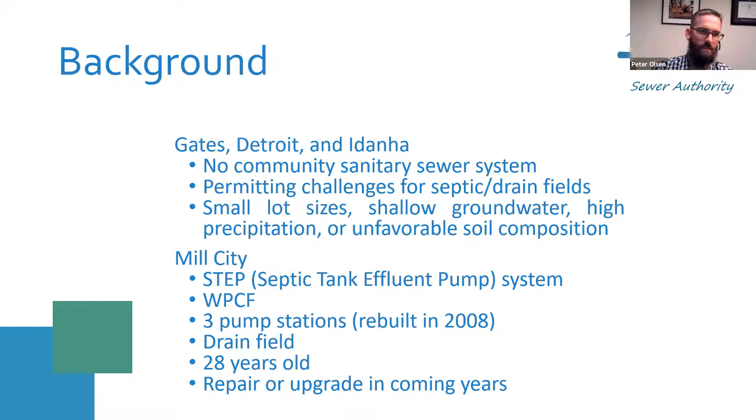Overall concepts for the wastewater study. Peter, I'm going to just remind you that there are going to be some people on the phone, so some of these you may actually have to talk through. All right, fair enough.

So the overall concept of the wastewater master plan: the elephant in the room and the big subject here is the 3-basin rule. The 3-basin rule essentially is you cannot discharge to the surface waters and increase the loading to the North Santiam River. This rule has been in effect for decades and has limited the capability to have a wastewater system that discharges to surface water through typical permitting processes.

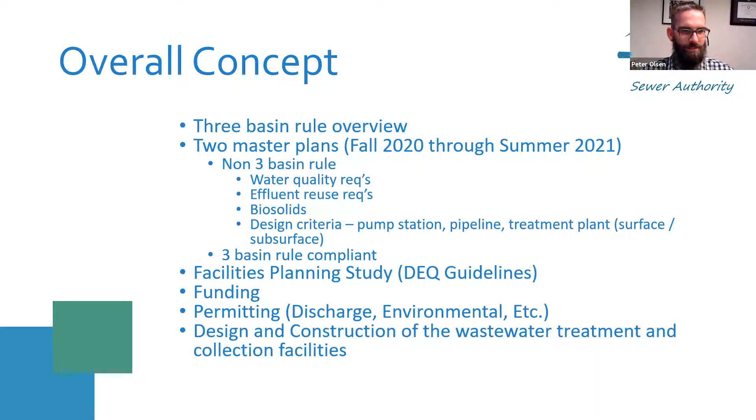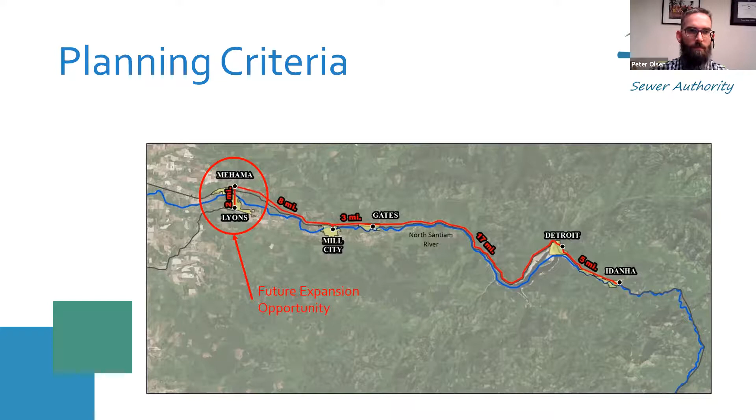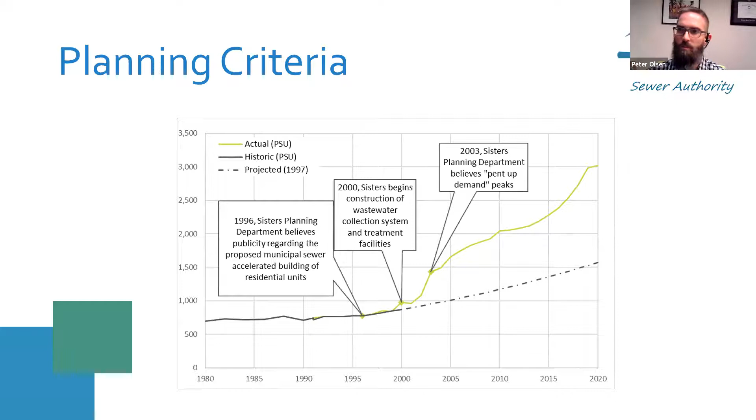As I mentioned, we looked at Sisters as a case study to inform us. It was not based solely on Sisters and what happened there, but it is just over the mountain. They installed a system around 2000 and saw a big growth increase, higher than what PSU had projected, because PSU doesn't account for things like this. So we used their data to help formulate what that growth rate might look like for the North Santiam Canyon with a community sewer system in each of these communities.

Then we took the growth rate that we had established, which I mentioned already, 1.6%, and applied that to each of the communities. And we looked at these on a basin basis. So Gates and Mill City would be combined, and Detroit and Idanha. And for this part of the study, we did look at Lyons and Mehama and what that growth rate would look like. And then we combined them all to see the overall population and what that projects out to be. And you can kind of see the flatter portion, the light blue of the graph here, that's what PSU's population projections would show. And this is what the 1.6% growth rate would project out to be.

And I would like to point out one other piece, that when we were doing this augmented calculation for their planning criteria originally, this started with the feasibility study in 2016 and 17. The Detroit and Idanha number, we didn't expect it to go up very much. And it's still under what it was in the 70s. And so I think there was some question of whether or not the growth would be more than that. But I just want to point out that in that area, it was not expected to be more than what was there in the 70s already.

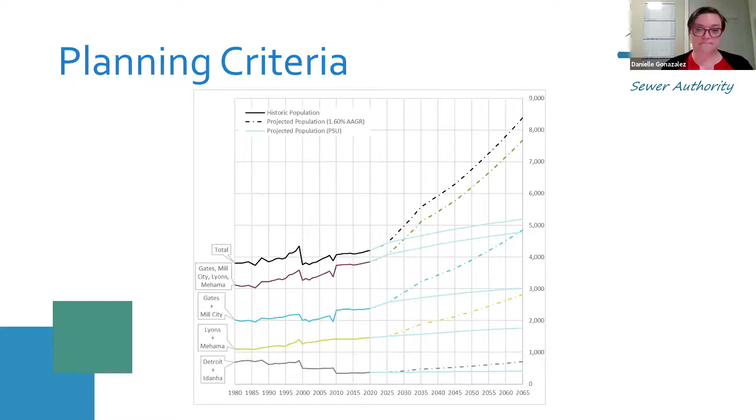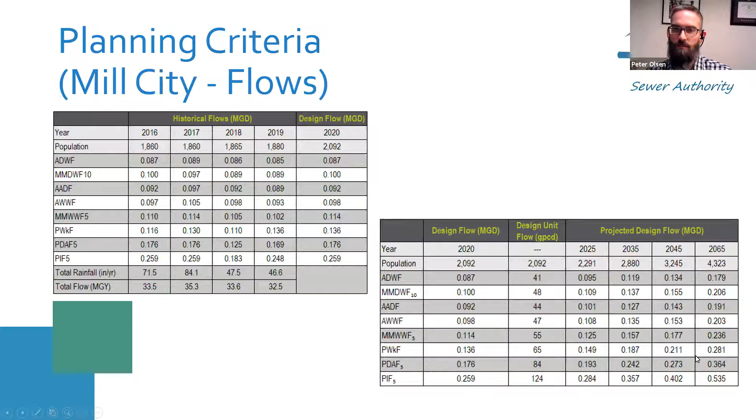We took these design flows and then based on the population projections, increased those on this gallons per capita per day flow, and projected those flows all the way out to 2065 and what that would look like. We did the same thing for Idanha, Gates, and Detroit. And this slide is just simply showing the historic flows based on the water system demands converted to wastewater flows. And that's a process I won't go into detail here, but if anybody ever wants to geek out on that, I'm happy to oblige.

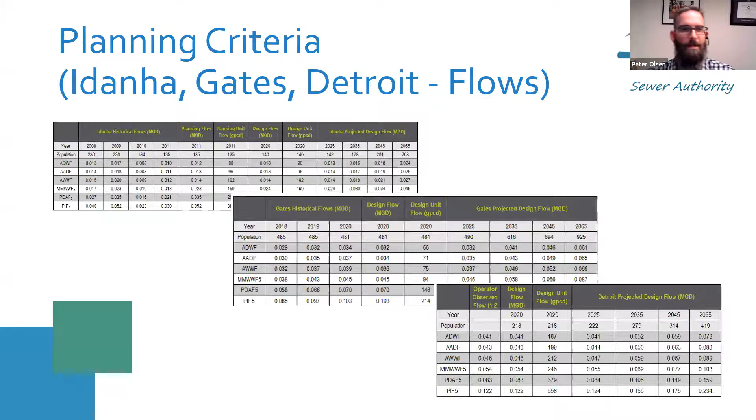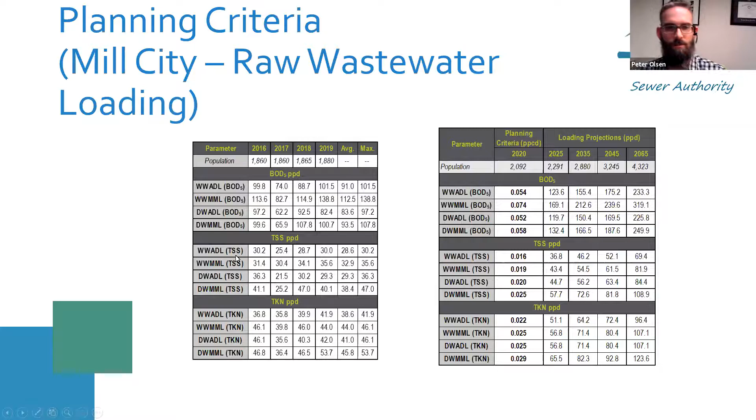And this is the same thing for Idanha, Gates, and Detroit. As I mentioned, converted to what that would look like with a higher strength loading without the STEP system. If the STEP system ends up being the recommendation for the systems, these will also need to be adjusted to show a much lower loading than what would be at the treatment plant for the gravity system.

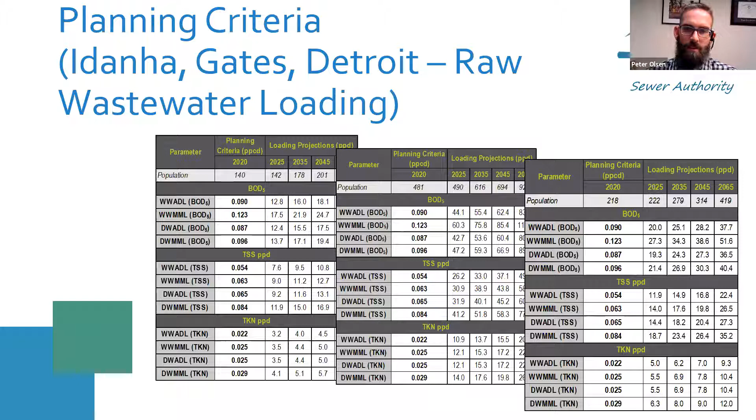Next, looking at the collection system layouts, we've done some preliminary layouts, and we're looking at pipelines, lift stations, manholes, these types of things. And we're looking at what the slopes are. We're trying to avoid as many lift stations as possible to avoid increased costs. And everyone who's listening in or watching here would know that that's a challenge in some of these communities. Some of them, you get really steep slopes, and then other ones you get the slopes going the wrong way. So the last couple of weeks we've been working on this. What we have is preliminary. Don't take any of this to the bank. They will be finalized. But I feel fine giving people a sneak peek at what we're looking at.

For Idanha, this is what it could look like. We have challenging areas down here close to the river where we're probably going to have grinder pumps to pull those properties up to the gravity system. We've got 2 pump stations and then a potential treatment plant in this area. The yellow line is the force mains. So that's a pressurized pipe coming away from the pump stations, and they typically discharge into a manhole, which then continues on by gravity flow. This yellow force main here would be the one coming from Detroit to the Idanha system to be a combined treatment system.

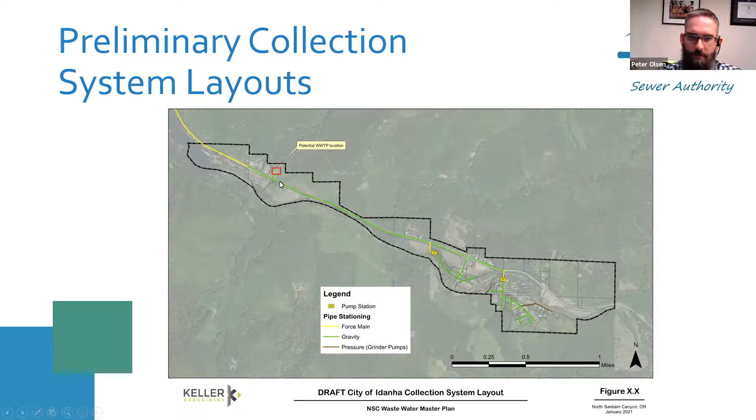This depicts Detroit, what we're looking at there, and Detroit is a challenge, Ken. It is a challenge. This is not news to you, I'm sure. But what we ended up with is needing 4 different pump stations. And I will mention, if the recommendation is for a STEP system, this becomes a lot simpler, I would say, maybe less challenging, because the STEP systems are all pressurized mains. And so those can all be installed at 4 feet below the surface, and we don't have to worry about the topography. It's a lot simpler and easier to work with.

But these are all gravity. The gravity system would be a lot more challenging. So this is what we're trying to depict of what that might look like to sewer the city of Detroit here.

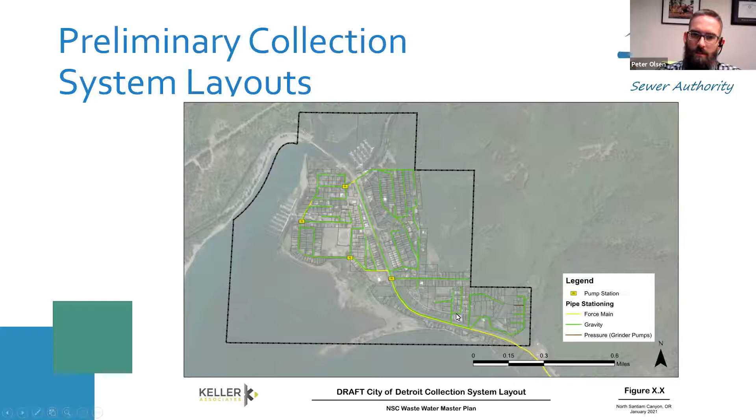For the city of Gates, again, there's a little bit of challenges, and one thing that we're trying to avoid is getting these pipelines too deep as well. We know there's rock, we know there's boulders at shallow depths all throughout the canyon. Keeping these as shallow as possible, but with enough cover, that's the challenge that we're looking at when we're laying out these collection systems. Gates, we're looking at 4 different pump stations.

And 1 pump station will take it and send the flow out from the city of Gates towards the city of Mill City. That's what this force main going south on Gates, I think it's still Gates School Road at that point, going up the hill and out of the river valley there.

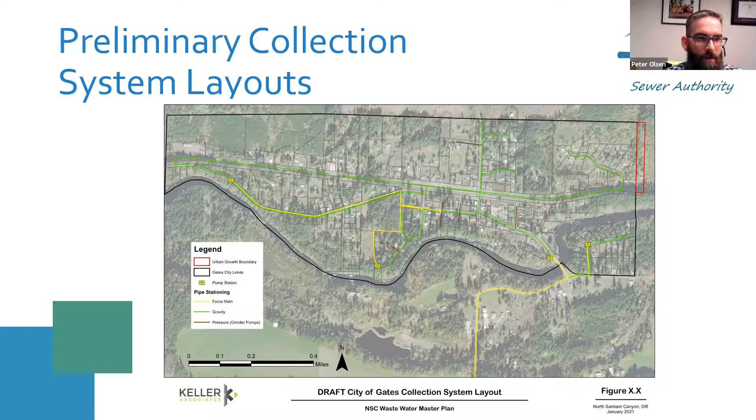City of Mill City is existing. So this really just depicts the existing system except for the line coming from the east here from Gates. It's a potential alignment. Again, don't take that to the bank. But what we're saying is that's a potential alignment for bringing in the force main, the pressurized flow from Gates. And this is a potential treatment plant site. And it's only the potential site because that's where the existing plant is. And so for our purposes in our presentation today, it was best to leave it at that location.

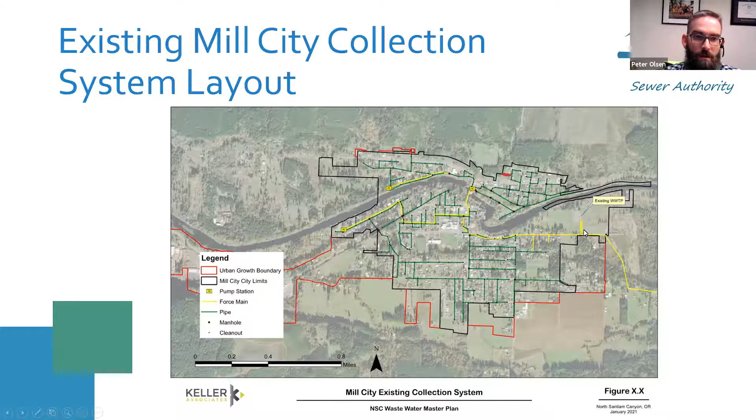Next, so we talked about collection system. Now let's talk about potential treatment plant sites. And my purpose is not to share information on all these different sites, but just to give you a flavor of what we're looking at and how we're looking at it. We've looked at all these sites. We've talked with the Sewer Authority Board. We've talked with the Technical Review Committee to get their insight, their input, what works, what doesn't. And then we've got a whole matrix of pros and cons of different locations. And it doesn't mean that one that's not here couldn't be here, but it helps us to put a frame of reference on it and then narrow that down and make some recommendations.

And you can see some of these, like this, what we're calling the Rock Creek site. We don't need the entire site. We don't want to go down close to the river over here and get in the floodplain, but we're looking at anywhere from 5 to 6 acres of property to be able to develop into a treatment plant facility. What you can see on here is you have the floodplain depicted on this figure, as well as the wetlands inventory. So that's Gates Mill City.

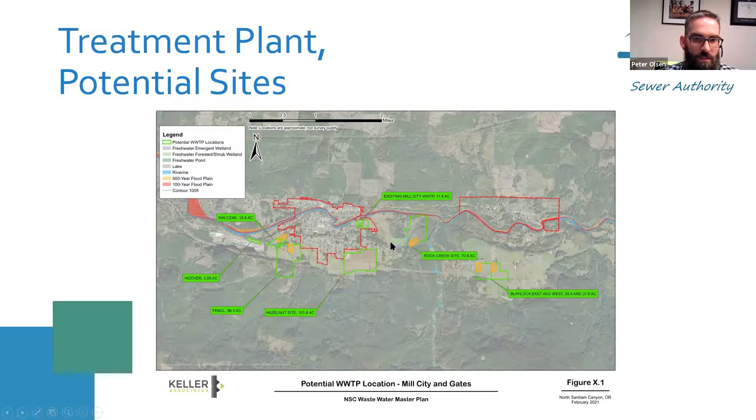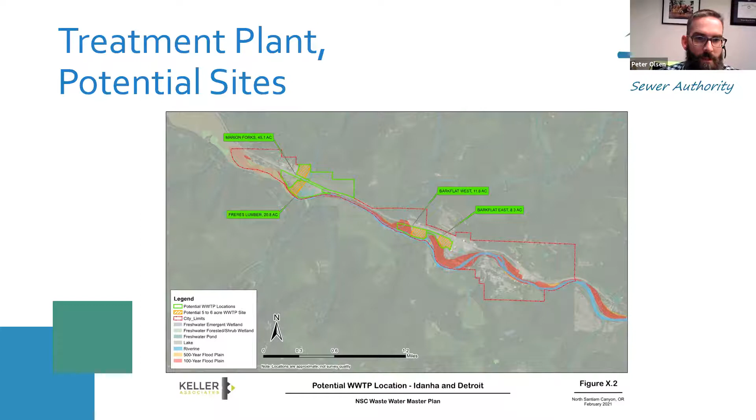This is the Idanha area. Looking at a couple different properties and locations. And then Detroit, we are showing a couple potential. And as I said, these are not the locations where it's going to be, but we are evaluating and looking at these as potential.

And with that one, you know, there was also some talk about expanding service possibly in the future. The Forest Service has shown a lot of interest, as well as the state parks. So we are trying to add all of their potential needs down the road into the plans, but without us actually increasing the cost for the local people. So just know that that's in the back of our heads when we're doing some of this planning as well.

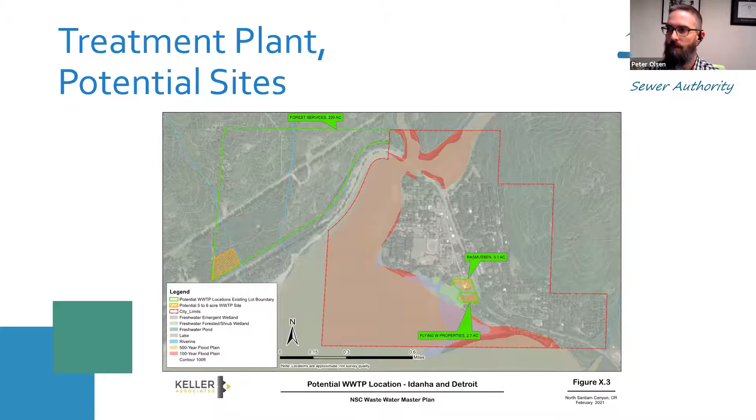Thanks, Danielle. Next, so we've talked about the collection, the treatment, and then looking at disposal. And as far as disposal, oh, my keys did not work there. There we go.

For disposal by infiltration, so an infiltration site, we worked with GSI Water Solutions to go through quite the process of looking at different areas of the canyon, areas of the cities, and looking at what the soils look like. We went through quite a lengthy process of narrowing that down and selecting 4 locations where they could do some physical testing and do infiltration testing.

They completed that work and then provided a final memo of recommendations: the estimated permeability and, more importantly, the volumes of water that they anticipate it could hold. Would it hold enough volume? So it's not just the infiltration rate and how quick it goes down, but can the groundwater or the substrate handle that much volume on a regular basis?

So I'm not the expert there, but hopefully I explained that well. Matt Kohlbecker has been a valuable resource there in looking at that. The results and recommendations, I'll summarize: looking at the Gates Mill City area, it's promising to have an infiltration facility. It looks good. The soils may work with us and be able to do that. In the Detroit Idanha area, it's the opposite story. It's a lot more challenging and does not look as promising for an infiltration facility. So that's kind of the short summary of that.

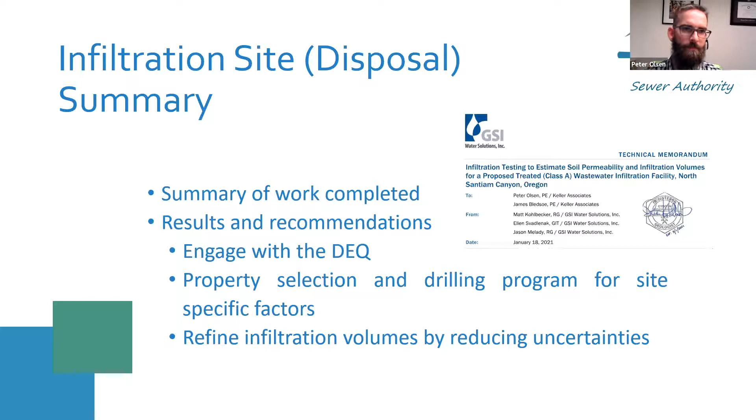Three basin rule and our direct stakeholder engagement. This is obviously one of the larger challenges with the master planning process. We have meetings that we're holding with the stakeholders. That includes the county, downstream cities, specifically the city of Salem, and state legislators, and having conversations with the Oregon DEQ. And I recognize that this is a challenge for the DEQ as well in their process and working with us, but they've been good to work with so far, educating and helping us understand what they can and can't do, how things are interpreted, and looking at the three basin rule. So that's appreciated, and there's a lot more to discuss and work on with the DEQ as we move forward in the overall process.

Yeah, and if I can add something on that, Peter, with the stakeholders, of course, the three basin rule impacts the ability for us to do the infiltration or discharge. And so the city of Salem and Stayton and a few others, the city of Gates also, get their water from the North Santiam River. With the downstream cities, Salem in particular, we had a conversation with them in December, sat down with Steve Powers, the city manager there, as well as one of their wastewater engineers, Jason Pulley. He is actually on our technical review committee. And so we've had those conversations. They were promising conversations in December.

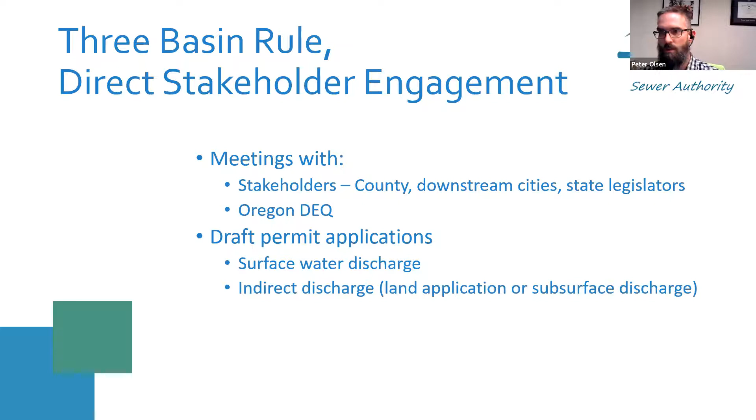And part of our scope includes draft permit applications, just so we can give the board and others an idea of what those will look like. And that's for both the surface water discharge, if there wasn't a three basin rule, and then the indirect discharge, so either land application or the subsurface discharge from a water pollution control facility.

Another aspect of our scope is looking at Mill City's existing sewer system and evaluating it. As I mentioned, in November we visited the city, visited with staff, interviewed them, visited the facilities, and have done an evaluation and analysis of the capacity based on their data and what they call the DMRs, the discharge monitoring reports. The short summary of the results is that they're at about 94% of the capacity of the existing treatment plant there.

We'll have recommendations for short-term improvements, and that includes the short-lived asset replacement. What that means is valves, stuff that has a 5, 10, 15-year lifespan that needs to be replaced. They're either well over their expected life, or they will be. So there's a number of valves and items, electrical, that need to be replaced. And looking at what it will take to get some kind of short-term capacity increase.

So those will be included in the recommendations with the master plan. And then probably more important, but equally important, is the valuation. So what's the value of the Mill City's existing system? The city has invested, obviously, since it was built until now, and their existing system has a lot of valuable infrastructure there. So we're putting a value to that, which also feeds into what we're calling a business case scenario.

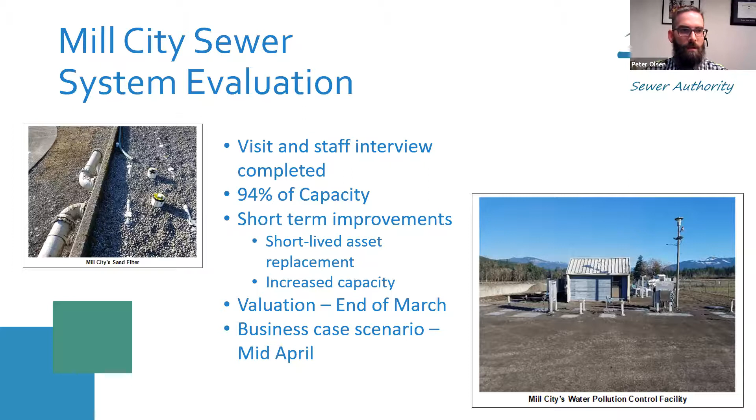As we look ahead, I had mentioned in the schedule for the master planning process, we've got the next TRC meeting. We have 2 more TRC meetings, and then the draft master plan report. And we have another town hall. I think that actually has the end of April. It's actually May. I apologize for that typo. And then the final master plan, we're looking towards July. So the summertime for the final master plan.

And then obviously continuing the 3 basin rule, direct stakeholder engagement, an important and vital aspect of it all. Post master planning, as I mentioned previously, we're looking at the facilities planning studies, funding acquisition, permitting, and then doing the design and construction. The funding, permitting, there's a lot of subtopics there. So there's a lot to be done after the master plan.

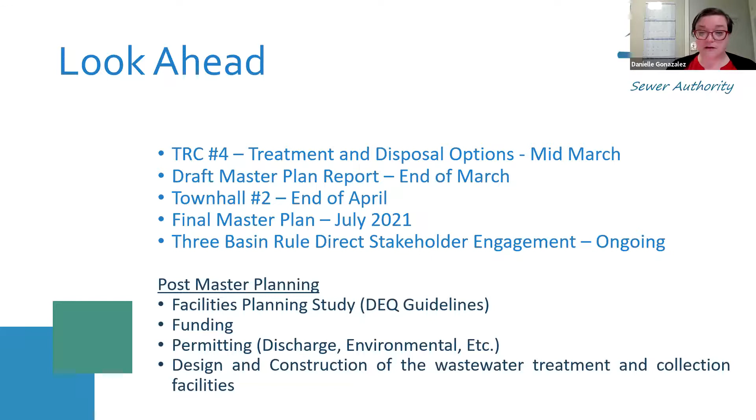And when we're projecting the fees, when we did the initial feasibility and then when we did the initial financial projections, we did conservative estimates based on how much debt the community, the sewer authority, could take on and what would be best, and calculated it out with the median household income to see if it was even possible to make it happen. With the help of many different agencies coming together, giving us information, we felt comfortable that there was a pathway forward for affording this

project. But that being said, it has to have a high amount of grant, direct appropriations, and low interest funding. And so that's what we're starting to chase now. If anybody wants to help, we need people to help write grant applications. And, you know, the way we all make it as cheap as possible is by getting as much of it out in grants or direct appropriations.

Got another one from Mary Ann. It says, in consideration of this project completion timeline, may I request the Sewer Authority support of a request to rebuild grace period window for wildfire victims. Wildfire loss property owners need to have the option to rebuild after the sewer system's in place instead of repairing existing systems. I know that the state has already made some delays, and McCrae, do you remember how long they have to rebuild currently?

Yeah, there's different provisions in different communities. It first is going to depend on your septic authorization happening and it being checked, and you being able to tie into it. But the ability to rebuild up in Detroit and Gates as you were, essentially on your foundation or where you were, is 4 to 5 years for each different city. So the timing of this project alongside that, that's about the same time, potentially, right? But if you're dealing right now with your permitting questions, that's already here. If you're thinking about building in the next year and getting back up there, you're going to be tying back into your septic system.